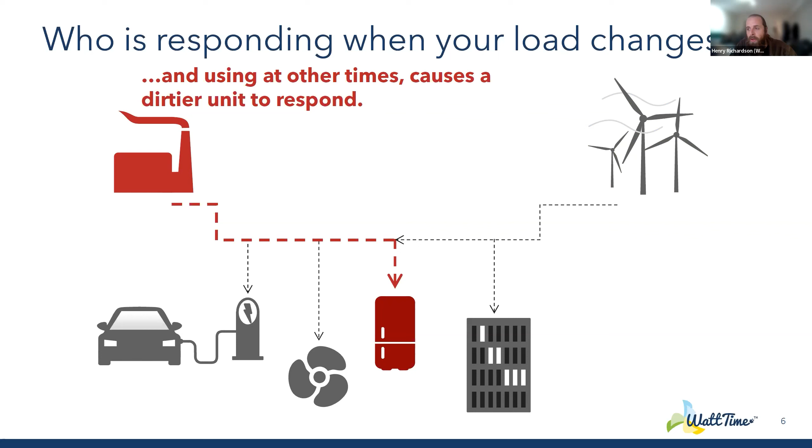So you actually can somewhat choose where your power comes from. The grid is a mix of a whole variety of different resources, and at certain times there's an oversupply of wind or solar. Then if you operate your device, you'll be able to use that. At other times you'll be pulling power from dirty resources like natural gas or coal, and we really want to enable that choice through automated control of various devices. And this is, of course, a really simplified view. This begins to make it a little bit more complex.

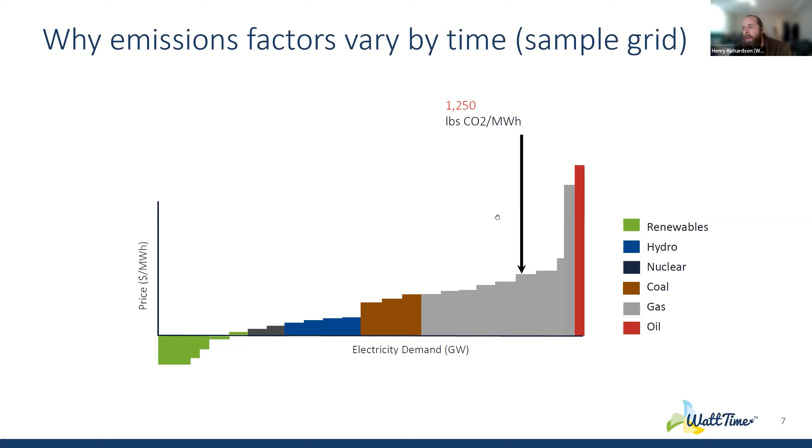So you can start to see that first they turn on the cheap and often clean things, then they turn on the other resources. Then as you get towards the peak, they turn on those really dirty, expensive resources. And as demand shifts, you can see that the responding resource changes. For example, at this time, if you increase demand, a natural gas power plant will ramp up to meet that demand. At this time, if you increase demand, it'll be a coal plant. And this mix of available resources is constantly changing throughout the day. The solar is not available at certain times, whereas the wind is available at others.

And so you can start to see that we rely on different resources at different times. And sometimes there's an oversupply of wind and solar that we can really take advantage of. And so this is kind of a simplified view of how the grid works, and we really care about what that marginal resource is. So if you have an EV and you want to plug it in, you can say, if I plug in my EV right now, will a wind farm throw away less electricity, or will a gas plant ramp up to meet that demand? And that's the question we're always trying to answer.

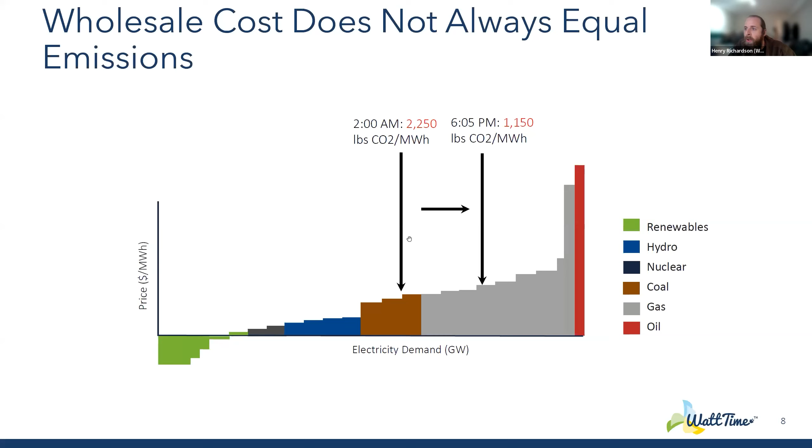And you can begin to see how this might affect building load flexibility, or building load scheduling. Of course, this simplified view is great, but we use a much more complex empirical model that looks at all the different changes of demand and resources and the emissions of actual power plants available from the EPA. We combine that with grid information from the ISOs and balancing authorities, and those are the entities that actually control the grid and determine which power plants turn on and off to identify that marginal resource. So we can answer at any given time which power plant is responding to that change in load.

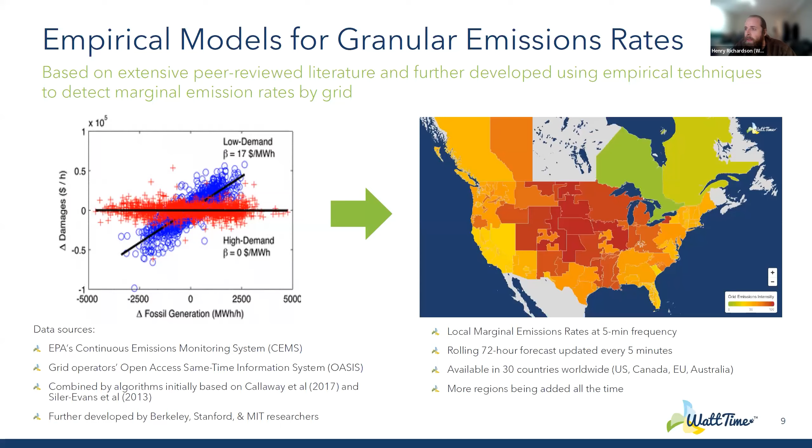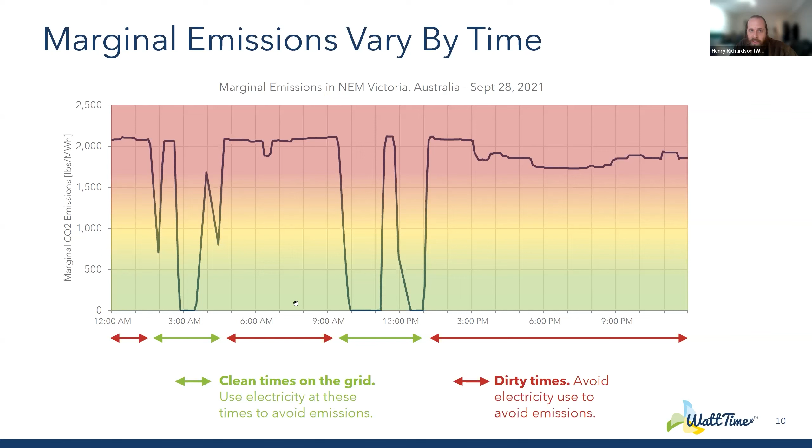And then WattTime has built a whole infrastructure to support this. So we take a bunch of real-time and historical grid data. We ingest that from a bunch of different sources. We run it through our algorithms to determine that marginal resource. We build a 72-hour forecast, and then we push that information to a bunch of data partners who then ingest that information and act on it.

So in this case, building controls are probably the most relevant, but we work with smart thermostats, EV charging and EVs directly, appliances, hot water heating, smart compute load. Can you shift when you run a specific compute load? And so you can start to see there are a bunch of different loads that could respond to a carbon signal. We're excited about thermal storage. UC Merced has an enormous thermal storage tank that can be charged at different times based on a carbon signal. Pumping for agriculture can also be dynamically adjusted based on load signals. So you can start to see this touches a lot of different industries.

I'm gonna talk through how we visualize and think about this, but any questions on the grid related stuff before I move on? No, there weren't any yet. Great.

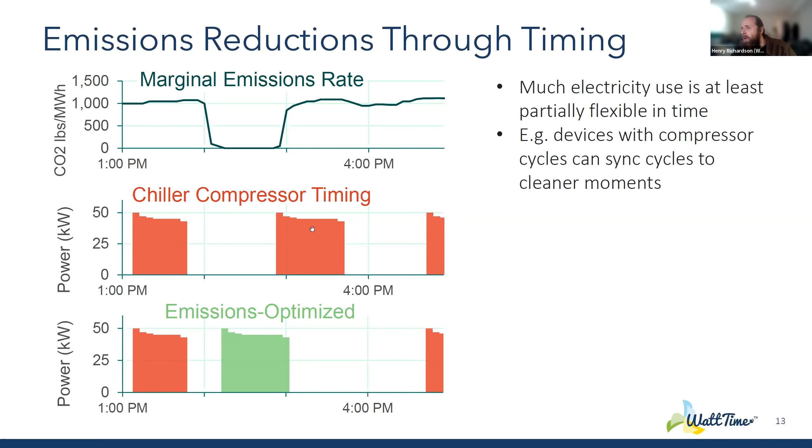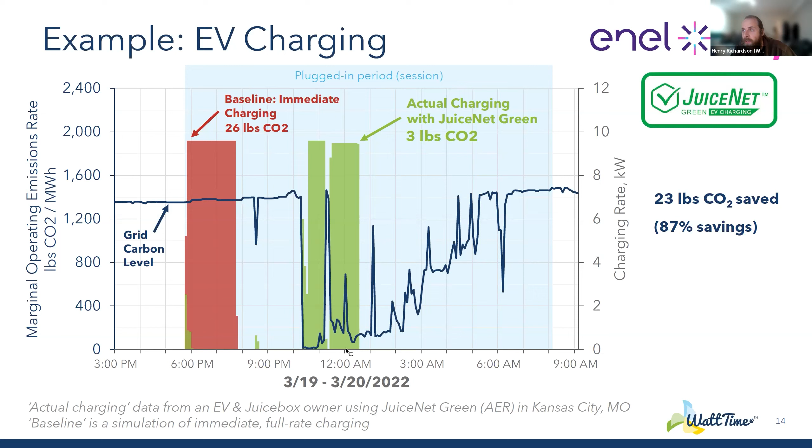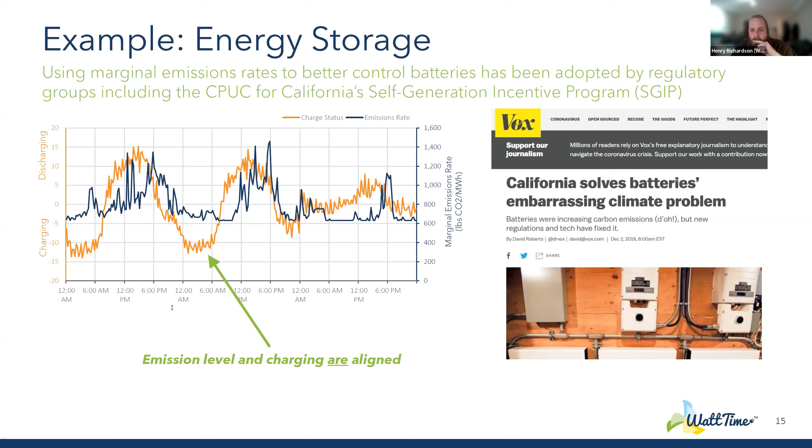And then one of probably the most relevant examples we've seen is we're partnering with an organization called BrainBox to really start to think about what it looks like to take emissions-aware control into buildings and actually dynamically control them. And so in our partnership with them, we are the signal provider. We understand the emissions intensity of the grid. We take that real-time value and the forecast and provide it to them through an API.

They ingest that information, and they install, I think, both hardware and software in the building to be able to zonally control all the equipment. So we're the signal layer, they're the control layer, and they actually say, okay, we see this is the forecasted emissions throughout the day. Can we pre-cool that building or preheat that building based on that signal so that we can capture those low emissions periods?

And if I understand correctly, they're actually going in and adjusting set points to a small degree so that the occupants don't detect or feel that change in temperature, but then the compressors and the chillers and all the equipment in the building actually respond to that change in set points so that their operation is shifted around in time to better align with the low emissions periods. And then the system, of course, learns the tolerances of the building, how much thermal lag or thermal mass it might have, things like that.

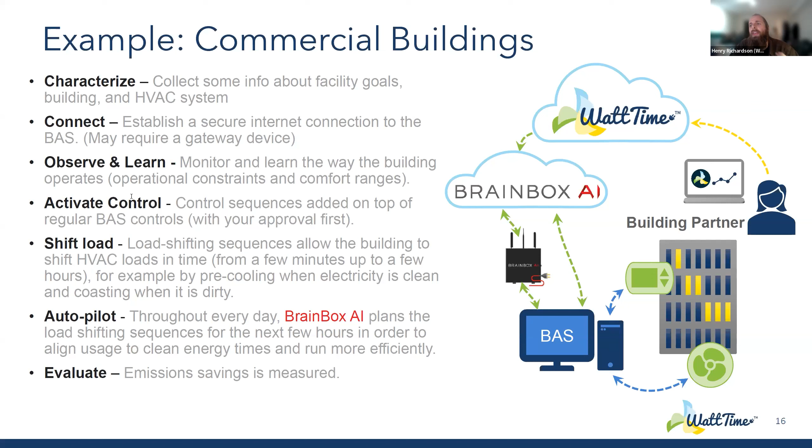And it starts to get into complex questions around, instead of just thinking about it from a monitoring standpoint and making sure the building is operating properly, there begins to be a feedback loop where we're actually going to dynamically update the equipment in the building and when it operates. And that's a much more sophisticated control system overall. Those are the key steps I wanted to touch on there.

There are a whole range of different technologies that you could potentially control in a building. So we touched on preheating and pre-cooling. That's adjusting set points. We're seeing an increasing number of buildings considering thermal energy storage, not just battery storage. So either ice storage or chilled or hot water, sometimes both in the same tank. We've started to hear Trane talk about that.

And so thermal storage really gives you the ability to increase thermal lag and run those chillers at more optimal times. We ran a study in partnership with LBL at UC Merced with their very large thermal tank, where they built a model predictive control algorithm that actually charged that tank based on both the price signal that the university was getting as well as the carbon signal, to dynamically select between them.

And prior to that, by incorporating a carbon signal, there was a significant change in chiller operation without a significant effect on utility costs, just because TOU rates are undifferentiated. So you can kind of charge anywhere within a TOU window without affecting cost, but there may be better or worse carbon times.

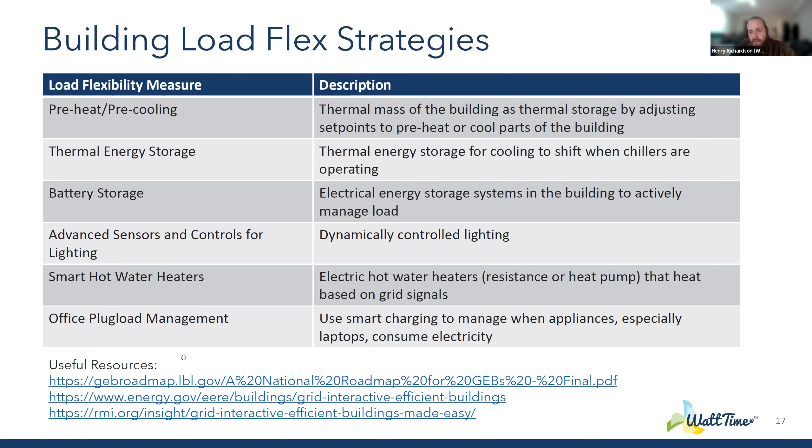I do also want to quickly touch on the language that is used to describe these things. Load flexibility or demand flexibility you'll often hear in response to different types of signal, whether that's a price signal or a carbon signal. We've heard the term environmental demand response to describe responding to a carbon signal instead of a price signal. GEBs, or grid interactive efficient buildings, is often used by the DOE to describe buildings that are dynamically controlling their load, specifically to a grid signal of some kind.

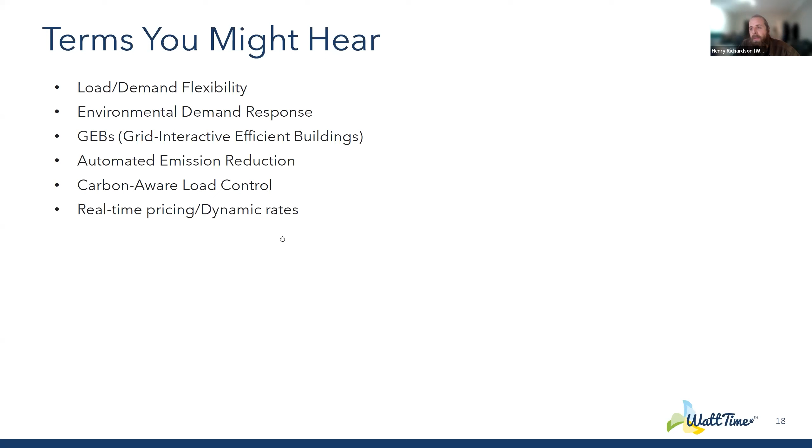We at WattTime often use the term automated emissions reduction. So there's an implied level of control, whether that's in a building, a device, an appliance, or an EV. It covers a lot of realms. Carbon-aware load control or carbon-aware dispatch is used often in the tech industry to describe dynamic load control for smart compute load. And then real-time pricing, dynamic rates, is a term used to describe a move away from static rates and TOU signals. These are all the ways that load flexibility is often talked about in this world.

And then finally, I want to quickly touch on a paradigm shift we're starting to hear about, away from traditional demand response towards continuous demand management. It's requiring a pretty significant update in how people think about buildings. Traditional demand response is really focused on a very few peak events throughout the year, where the utility or grid operator calls and says, hey, now's a critical period for you to reduce load, please go about doing that. And that may be automated. It could even be manual. We often hear the term sneaker net, where someone literally walks across a building and turns off certain circuits.

And we're moving towards a system of continuous demand management, where it's dynamic and responds to a changing signal. That requires a greater level of sophistication in the building operators, where they have to make sure that those systems are connected, they're working, they're controlling the right things and achieving load reductions at the right times and corresponding load increases at other times. And so that's definitely an interesting industry update that we're seeing growing significantly.

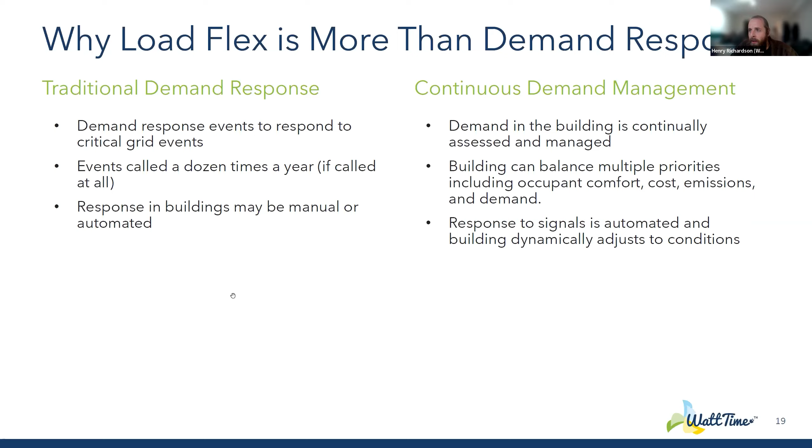That was really all the pieces I wanted to touch on. Any questions from anyone or anything we wanted to discuss here?

Yeah, I just have a little bit of a thought in this relative to the technologies involved with this. How far off are they to be able to have this commercially integrated? And in particular, I'm kind of thinking in lines of, well, if I have my house, I'm looking at installing a heat pump water heater. I'm going to be installing solar, kind of considering looking at a battery backup.

But with all these different aspects of the grid and looking at when the grid is greener than other times, the cost to do that is basically at this point borne by the homeowner, right? And I don't see the structure in the utility rates to help promote this. And some of that's got to do with the actual cost, and that's why I started out with the cost aspect of it. What do you see happening in that arena? And maybe it's a little bit outside of your talk, but I just thought I'd ask.

Oh, definitely. So there are a bunch of really interesting developments around this right now. So there are some existing dynamic rates, especially I believe in Oklahoma, where the rate varies significantly over time. We're starting to see the kind of push towards that in California as well, with the CEC and the CPUC putting forward proposals for dynamic rates or requiring that the utilities provide dynamic rates. But we're also seeing a lot of voluntary uptake of the ability to optimize for a carbon signal.